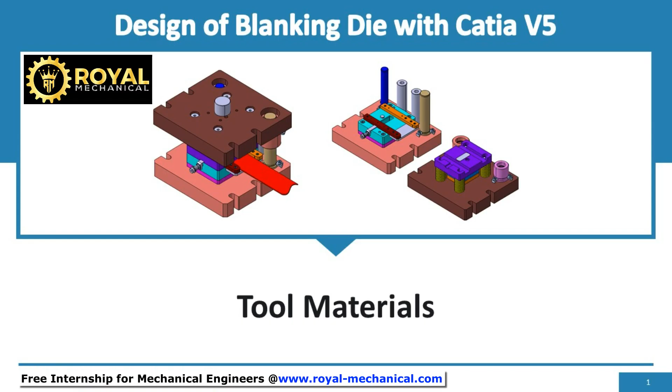Welcome. In this e-learning module, I shall explain and help you understand tool materials for all the make parts of the press tool. Before we proceed, let's recall the die structure.

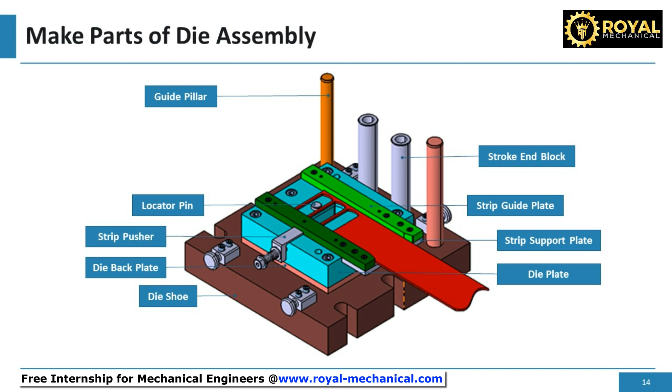The press tool assembly consists of the die assembly and the punch assembly. The die plate, die backplate, die shoe, strip guide plates, strip support plate, locator pin, strip pusher, guide pillars, and stroke end block are all the make parts of the die assembly. The blanking punch, stripper plate, punch holder, punch backplate, top plate, and guide bush are all the make parts of the punch assembly.

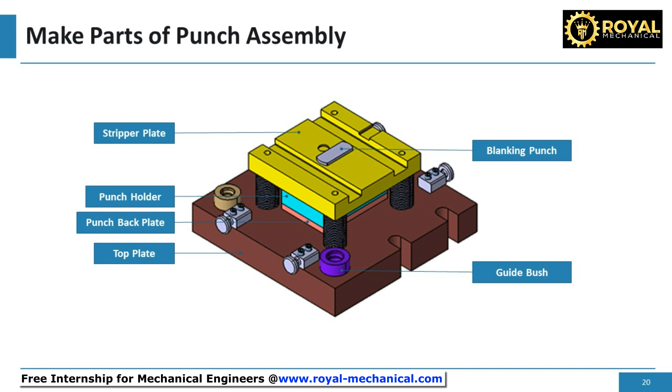To make the parts, we will have to buy the raw material and machine it. After making the parts, we will have to assemble them to build the die assembly, punch assembly, and press tool.

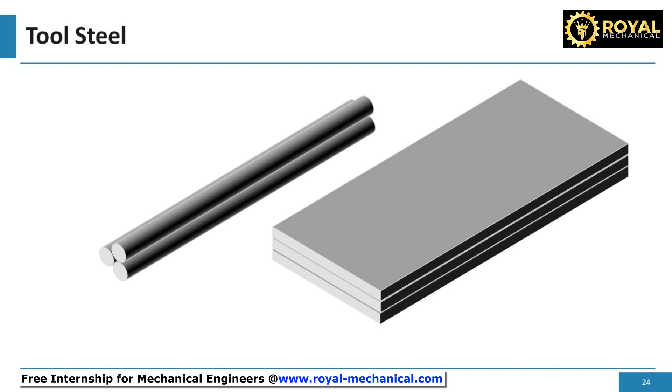As you are already aware, all the parts of the press tool are made of steel, and most of the critical parts are made of tool steel. Three essential properties of tool steels are: Number 1, machinability. Number 2, wear resistance. Number 3, toughness.

Machinability is the ease with which a metal can be machined. Wear resistance is the ability to resist the loss of material from a surface. Toughness is the ability of a material to absorb energy.

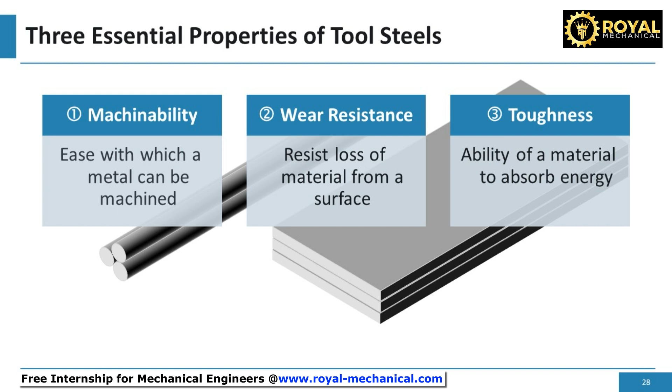Usually, the tooling industry follows the ASTM American Standards for Material Specifications. ASTM is the American Society for Testing and Materials.

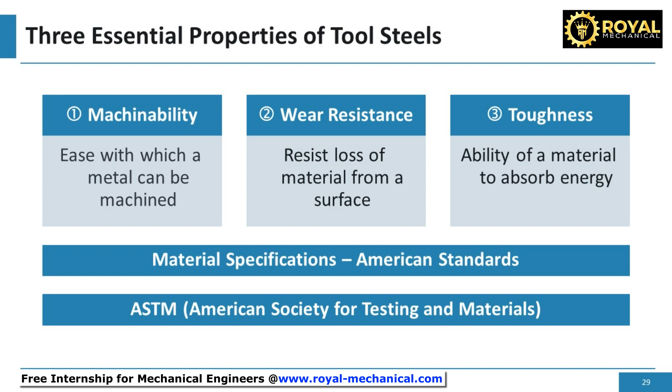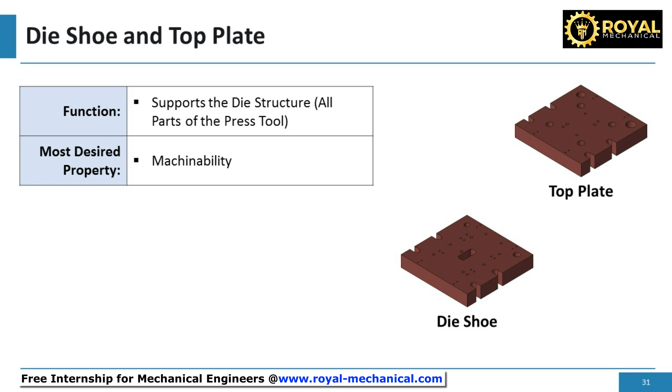Now let's understand the recommended material for the make parts of the press tool, as per their functionality. The die shoe and top plate support the die structure, that is, they support all the parts of the press tool. The most desired property is machinability. The recommended material is A36, carbon structural steel, as per ASTM A36.

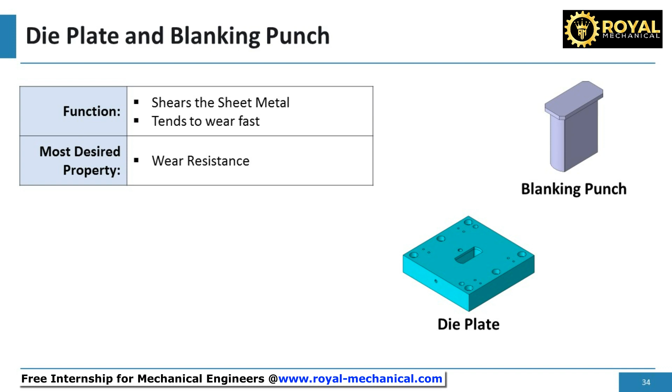The die plate and the blanking punch shear the sheet metal. They tend to wear fast, hence high wear resistance is the most desired property. The recommended material for the blanking punch and die plate is D2, high carbon, high chromium tool steel, as per ASTM A681. Heat treating the die plate to HRC 58 to 60, and the blanking punch to HRC 56 to 58, is recommended. The blanking punch's hardness is slightly lesser to ensure it wears first, as manufacturing the blanking punch is easier.

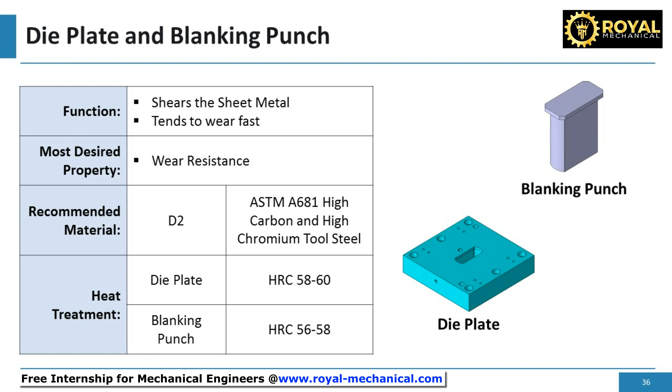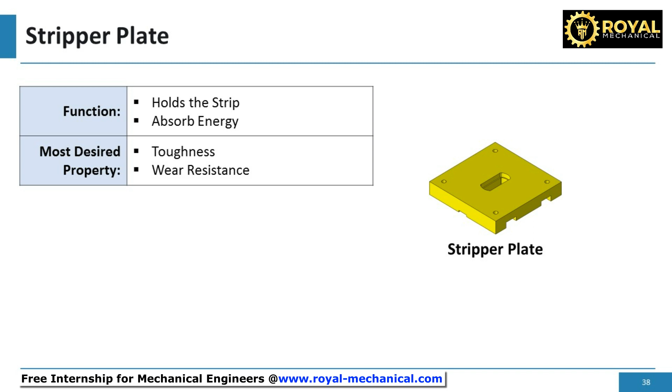The stripper plate holds the strip. During each stroke, the stripper plate comes and hits the strip, so it should be able to absorb energy. The most desired properties are toughness and wear resistance. The recommended material is 4140 alloy steel, as per ASTM A29.

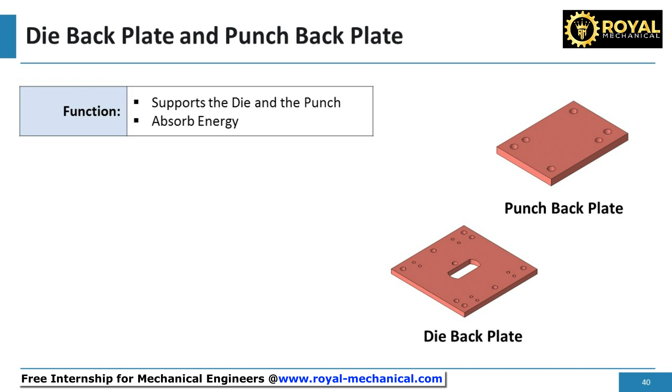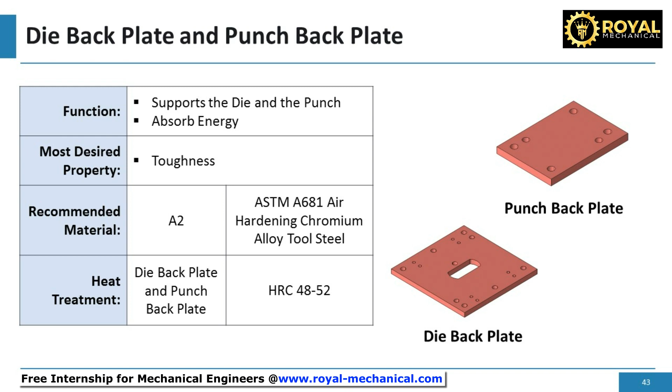The die backplate and punch backplate support the die plate and blanking punch. They need to absorb the energy coming from them, hence toughness is the most desired property. The recommended material is A2, air hardening chromium alloy tool steel, as per ASTM A681. Heat treating the die backplate and punch backplate to HRC 48 to 52 is recommended.

The punch holder holds and positions the punch. The most desired property is machinability. The recommended material for the punch holder is A36, carbon structural steel, as per ASTM A36.

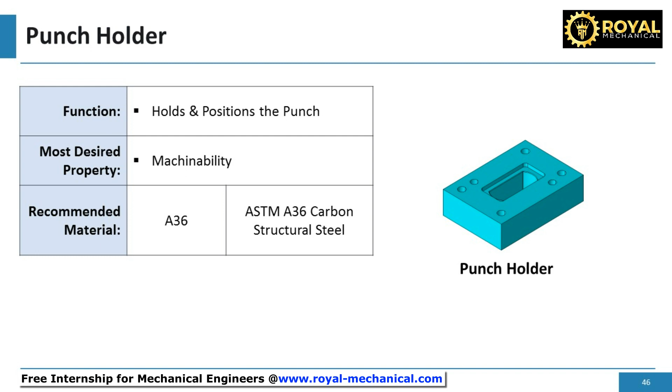The stripper guide plates and strip support plate locate and support the strip. The most desired property is wear resistance. The recommended material is A2, air hardening chromium alloy tool steel, as per ASTM A681. Heat treating them to HRC 54 to 56 is recommended.

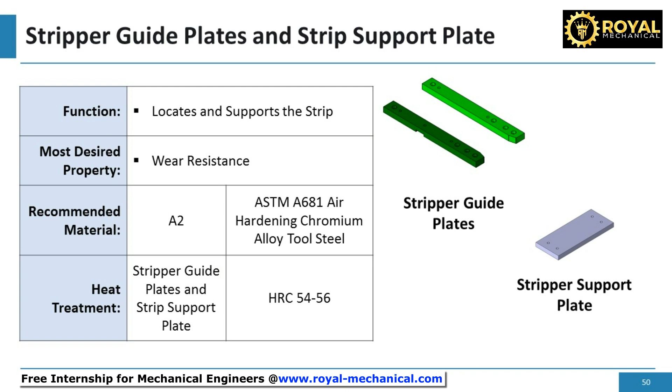The strip pusher pushes, and the locator pin locates the strip. The most desired property is wear resistance. The recommended material for the strip pusher and locator pin is A2, air hardening chromium alloy tool steel, as per ASTM A681. Heat treating them to HRC 54 to 56 is recommended.

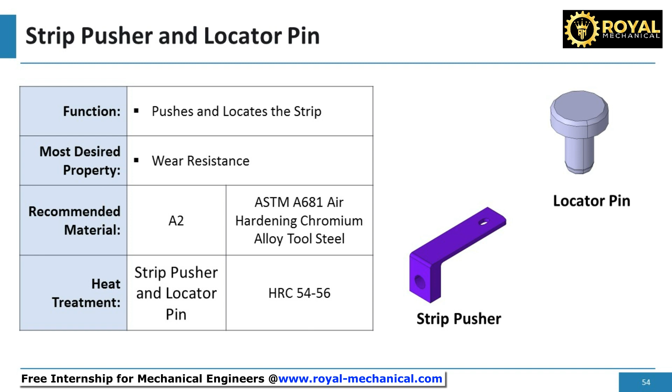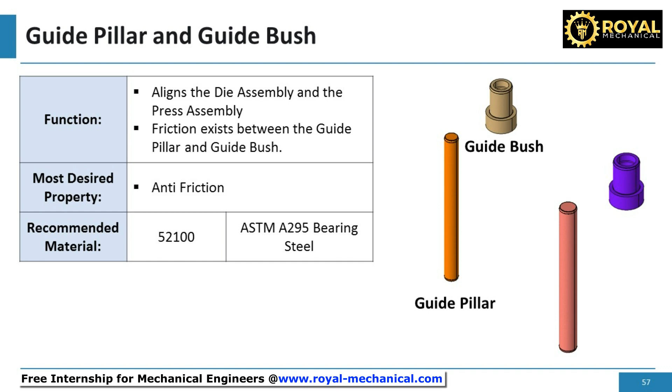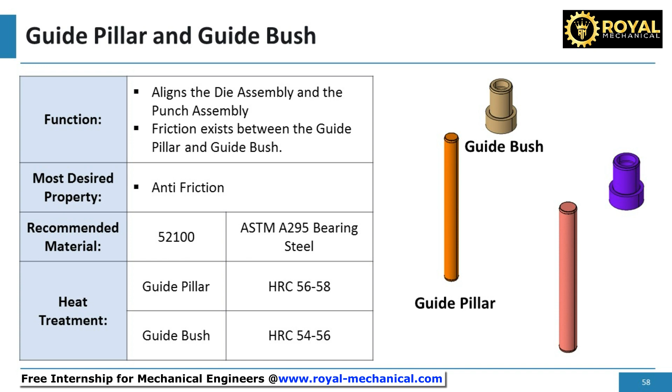Heat treating the guide pillar to HRC 56 to 58, and the guide bush to HRC 54 to 56, is recommended. The guide bush's hardness is slightly lesser to ensure it wears first, as manufacturing it is easier. It is also not uncommon for tool designers and toolmakers to use standard guide pillars and guide bushes.

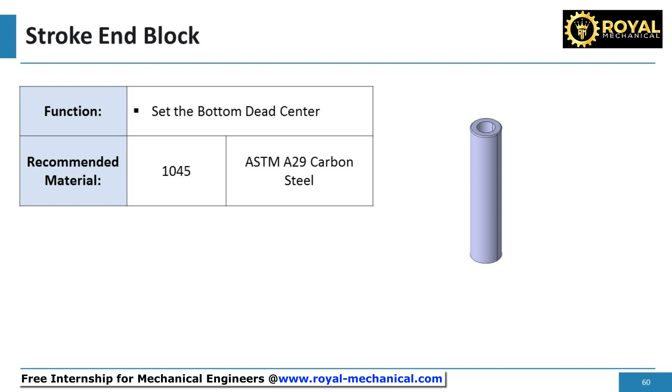The stroke end block is used to set the bottom dead center. Its recommended material is 1045 grade carbon steel, as per ASTM A29.

A variety of tool steels are available for selection. Each company, every tool designer, will have their own preference for tool steel selection based on experience. The tool steels recommended in this e-learning module can be a good start for first-time designers.

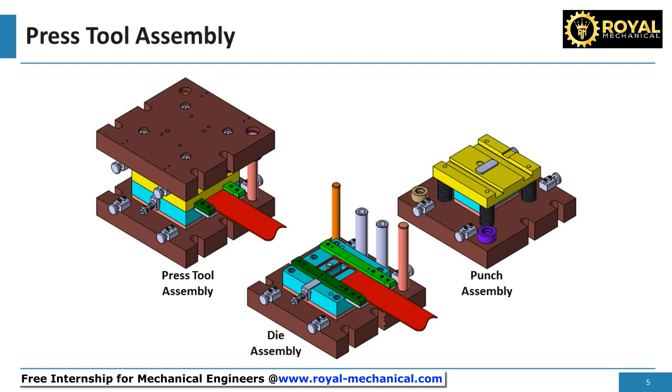With this, we have successfully learned about tool materials for all the make parts of the press tool. That's all in this e-learning module. Thanks.